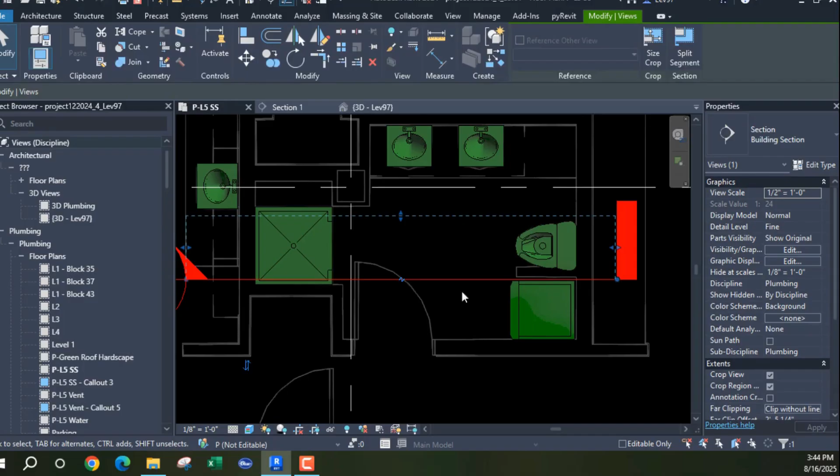So I'm going to go to my section view, and here's the shower, and I'm going to connect my shower to my water closet. I'm going to go so far down, put a P-trap here, and just kind of put it there so I can adjust it. You see, I can adjust it here.

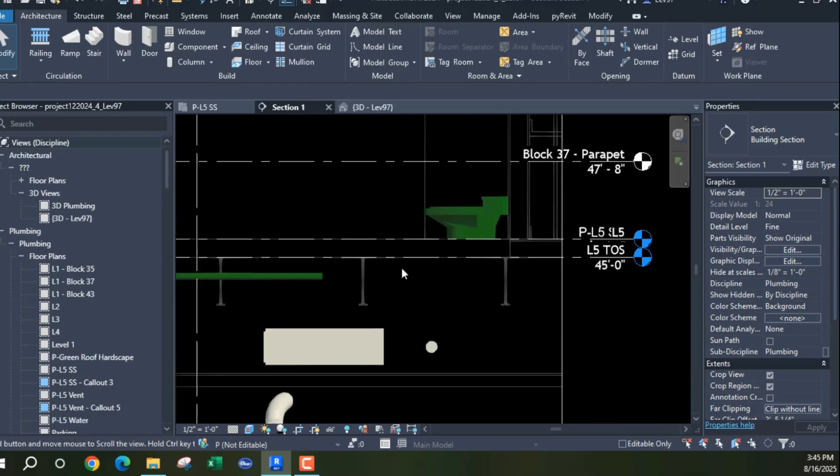And for my water closet, let's bring it down so I can make that connection. From here, I'm gonna go down to the floor below. Oh, I didn't want to do that. Okay, let's try this again. I'm gonna go down to my floor below.

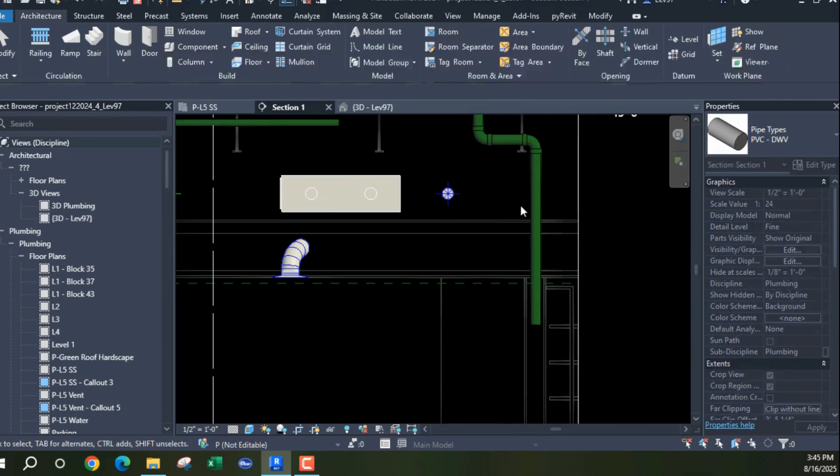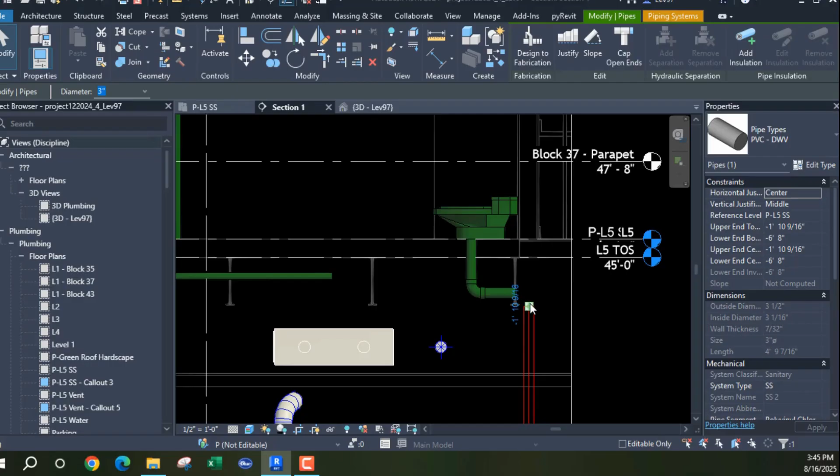Because there's a washer and dryer here, I'm going to extend this washer and dryer over, and the fittings are higher, so I'm going to have to extend this 3-inch pipe. I'm just going to erase this. It's a 3-inch, and from here I'm going to transition to a 2-inch so I can pick up my washer and dryer sanitary.

Okay, so that's that, and I'm going to erase this fitting and come over, because what I need to do is connect to my shower, which is going to be connected to my kitchen sink. So as you can see, they're in line here, but I need for them to be in line in the vertical, which is this direction.

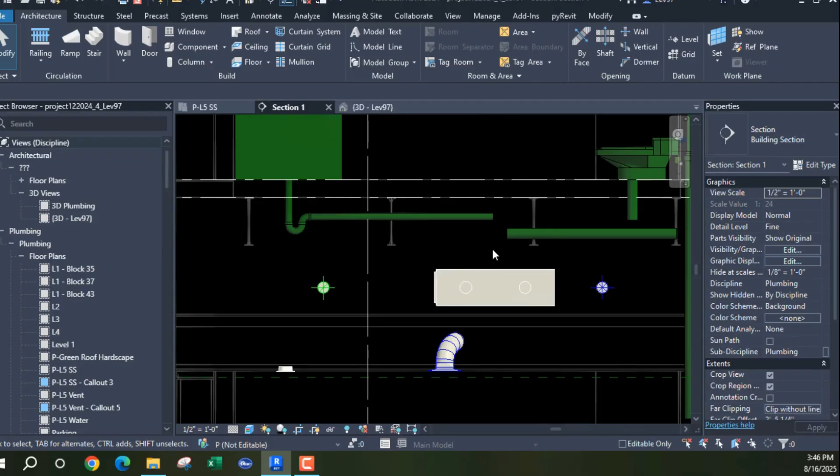So I think I'm going to go up. Let's go up so I can modify and align this pipe with this pipe. Uh-oh, let's go back again. I'm going to align this pipe and that pipe.

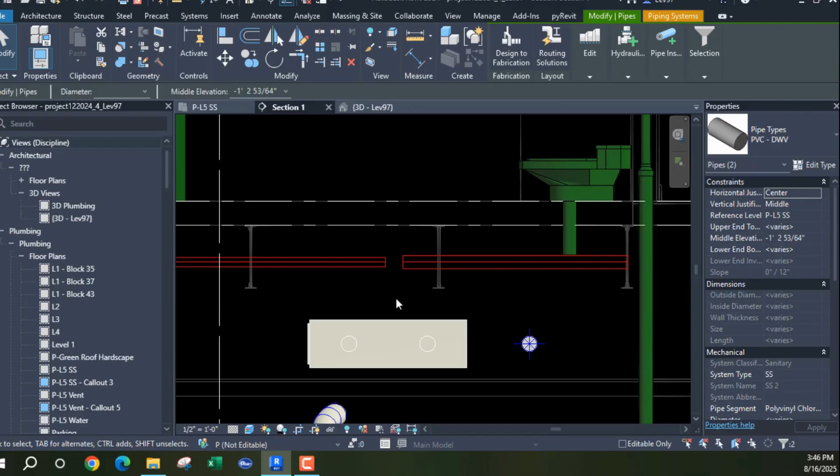So the problem is I'm going to have room. I'm trying to make these go down at the same time using my arrow key, and make this fitting. There's two fittings. There's a fitting here. Oh, okay. There's a fitting here, but I need to change that.

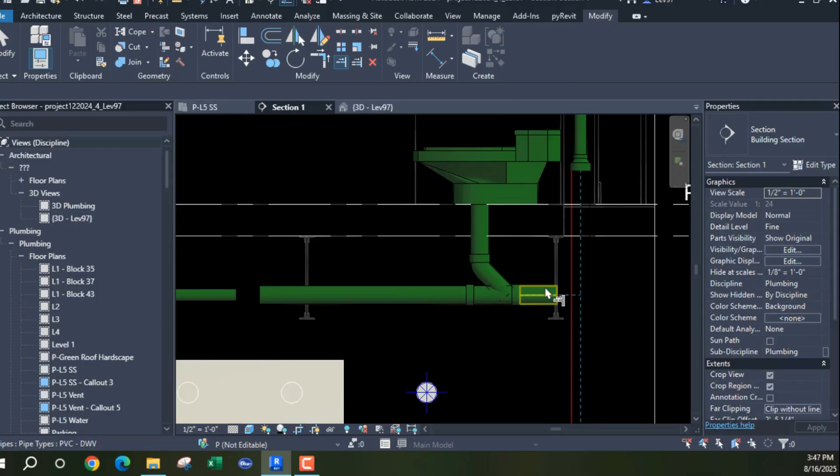And because it's going the wrong direction, I can flip it. Okay. And here, the same thing for this vertical, but only it's going to get a different kind of fitting. So here I'm going to put a sanitary fitting on it, which is this guy.

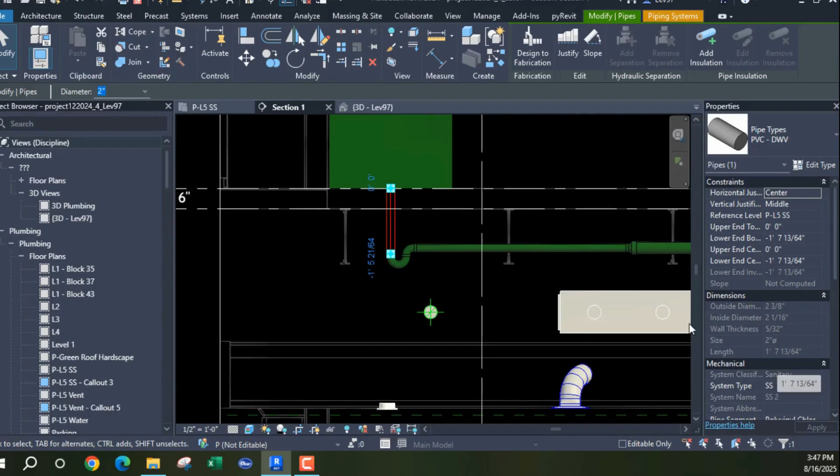Okay, so those two I can extend. Let's extend this over, and it should give us a reducer here. That's our fitting. That should be less than 2 feet, and it is 19. So we have those two. So I'm gonna go over and look at my...

My kitchen sink, because I'm gonna need to have my kitchen sink connect into this 2-inch coming off my shower. But in order to do that, I'm gonna have to go inside my wall space.

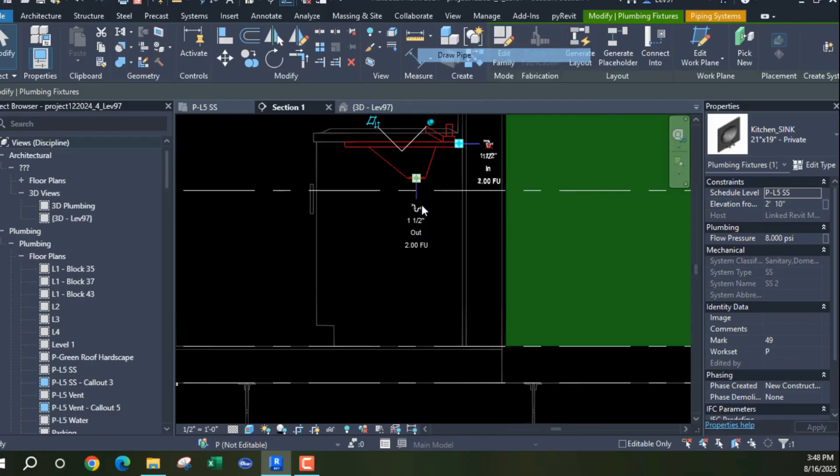Okay, that's 2 feet 10 inches off the floor, which is standard for sink. So I'm going to go all the way down. I'm going to show something here. If I continue to go down, but I can't do that because...

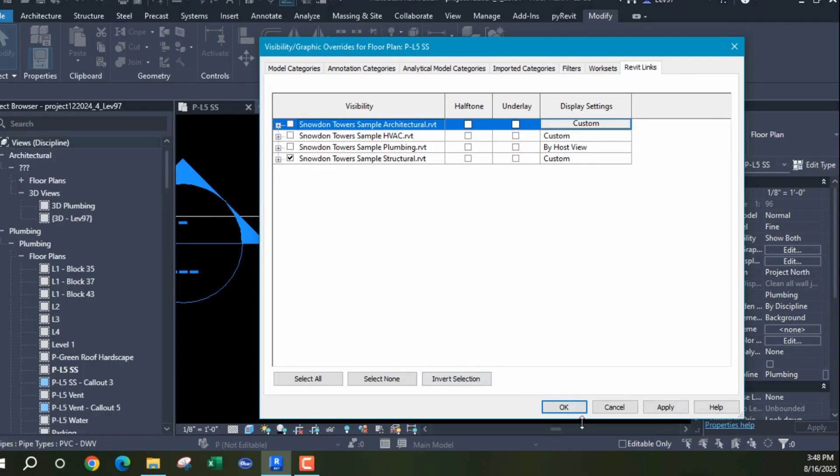There's a beam in the way. So if I change, let's see, if I go here, I'm going to show that there's a beam. Let's see if it's going to show. And here, make this wireframe. So there's our beam.

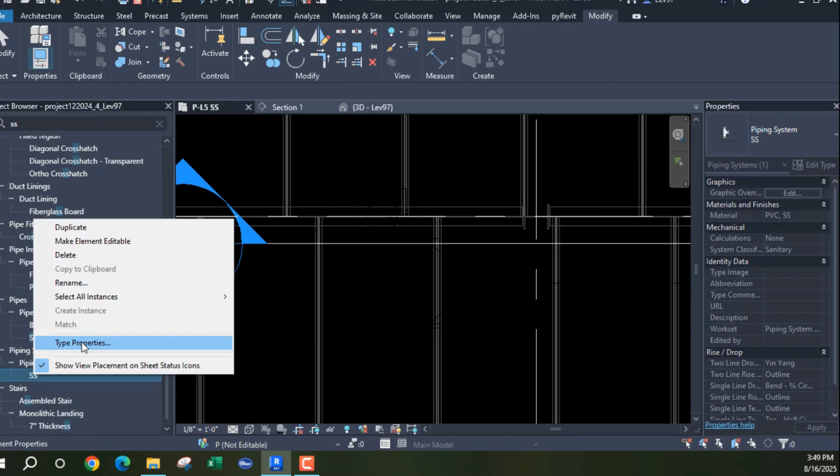And the reason that I can't see my fittings is because if I type SS and look at my systems here, right click on it, and my graphic overrides is white. And if I change that to black, you'll be able to see, let's go here, here. You'll be able to see that there's a beam here. Let me turn this off.

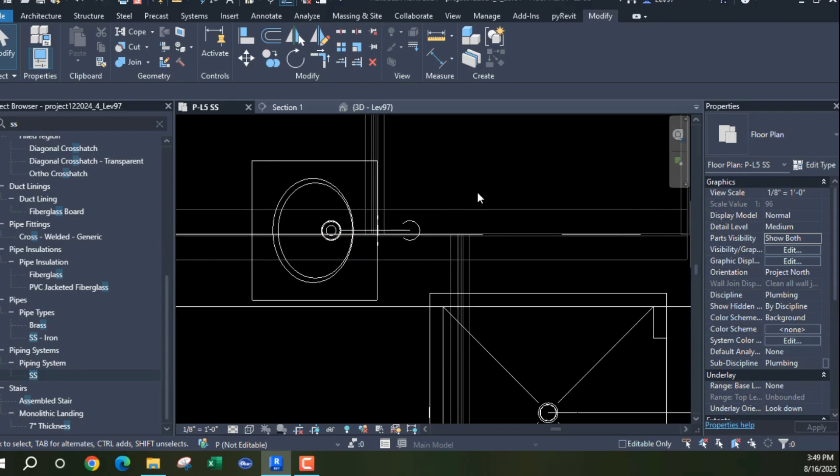And if I tab, so that's a W shape 18 by 55. Okay, so if we look at our, let me go back. Okay, so if we look at, am I selecting? Yeah, so if we look at the 3D here, you can see that it's going through this beam, okay?

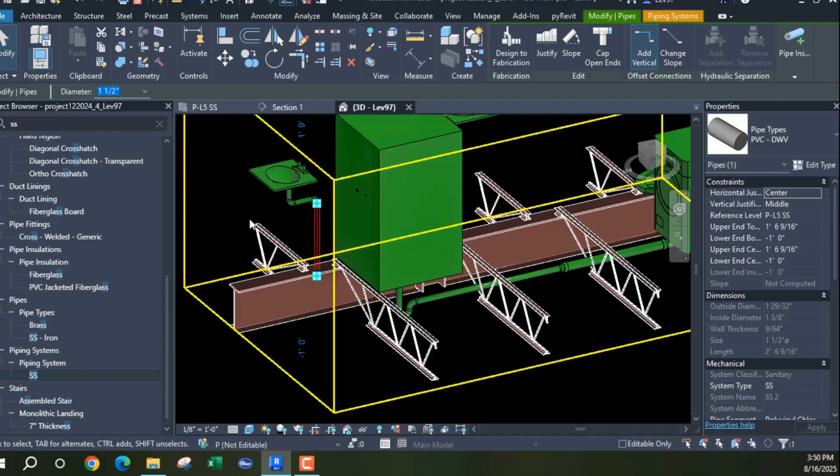So I can't go down to the floor because it's in line with my beam, so I'm gonna have to do something different. So what I'm gonna have to do is draw my pipe parallel to my wall, just coming over here.

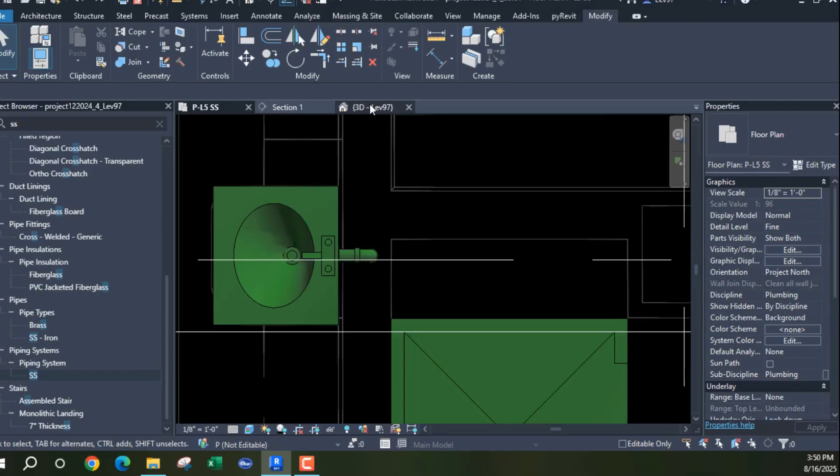Where are we? Are we still going back? Going back. Back. Okay, this is where I want to be. And I think that I need to erase that again. Where is it here? Yeah. So I'm going to need to erase that and draw my line or my pipe over.

Let's go here, and it's here. Maybe I can come out just a little bit more. Okay. And so we've cleared the beam. Okay. So the beam has been cleared.

Let's see, that's fine. So now what I'm going to need, after I've cleared the beam, I'm going to need to go down to where this pipe is. And it is at a negative 1.5. So if I come over...

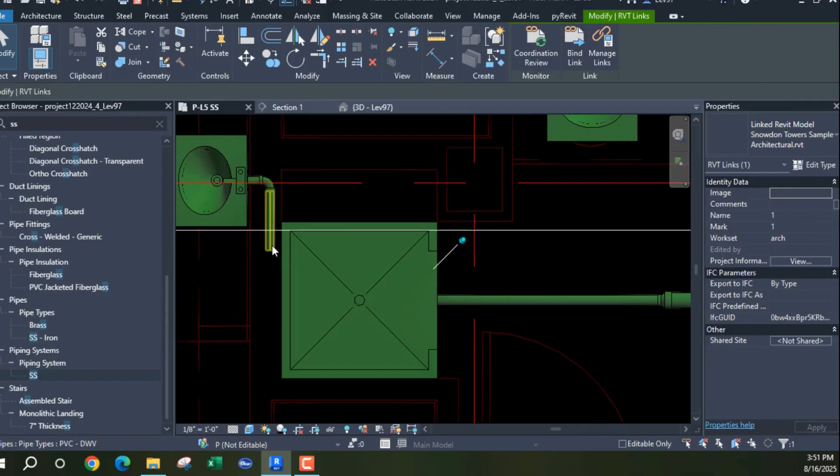I'm going to lock it. I just locked up my architecture plan. So from here, I'm going to come here and go at 45 degrees, because if I go down, I can't.

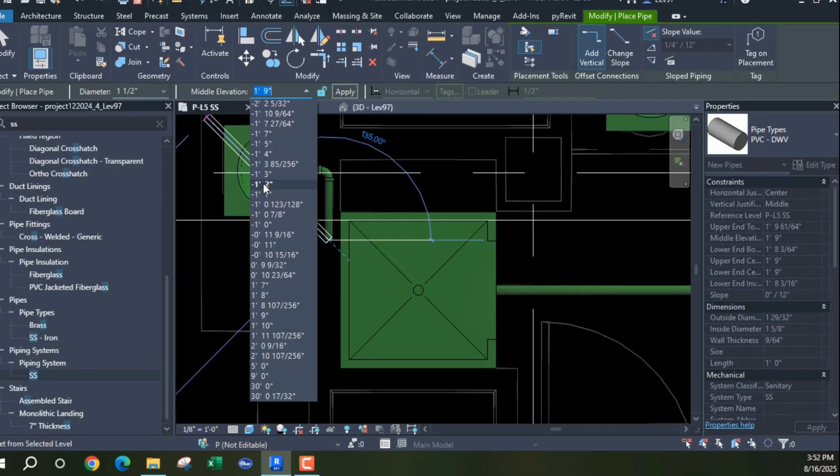Let's see, I have to make two 45-degree angles, otherwise I'm going to need a clean out. But I'm going to have to go down -1.5, I think was this one. But I don't want to go down exactly because I'm going to need to align it up, so I'm going to go -1.2. Okay, and here 45, another 45.

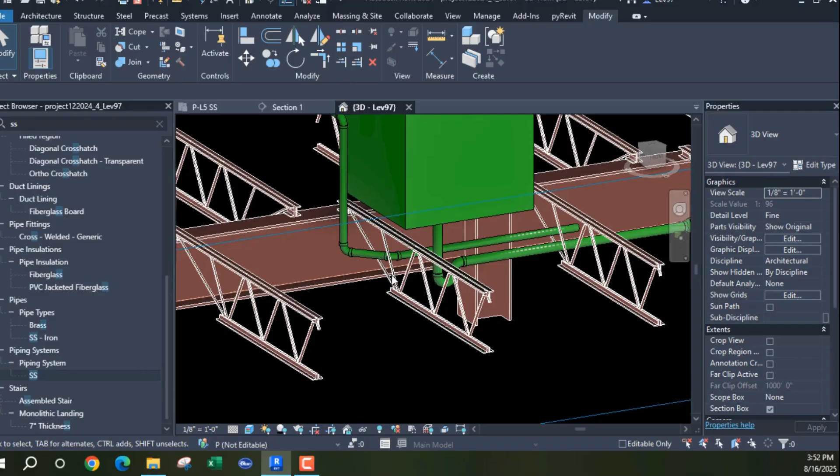So as you can see, what I've done is I've come down, bypass the structure here, come over and come down and create a 45-degree here, so I don't need a clean out. Okay, there's one 45, and that's my second one.

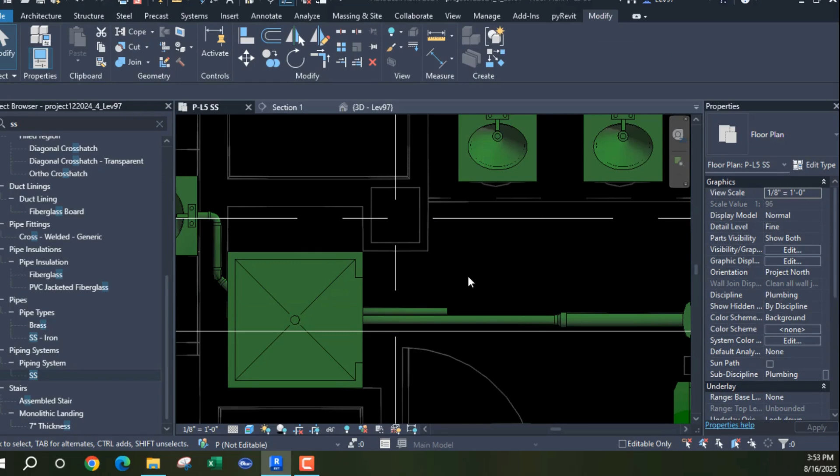So what I'm going to need to do is line up this 2-inch pipe with this pipe. So we go back to the floor plan, come back over here, and we can see that it's right there. So if I go to my section view and my disciplines are on, that means my structure and my mechanical is on, because I don't want to run into any ducts or any mechanical equipment, and that's the mechanical equipment - I turn that off, and tab, it is a heat recovery unit.

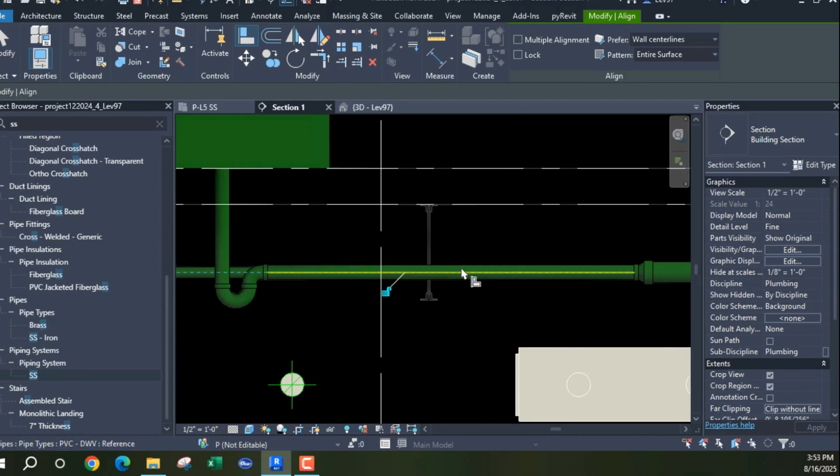Okay, so now what I'm going to need to do is align this pipe and that pipe. From here we can go back. So what I'm going to need to do, let's make this

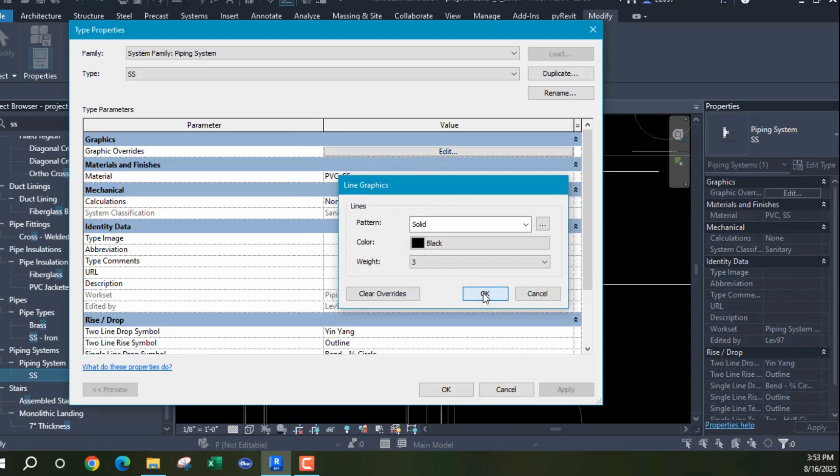Wireframe so I can see what I'm doing. I think another, I'm just going to change this to black so I can see what the heck I'm doing. Was it black or was it white? It was black. It was white. So now it's black, okay, so I'll change it back. So here I can see what I'm doing, and this pipe and that pipe go up.

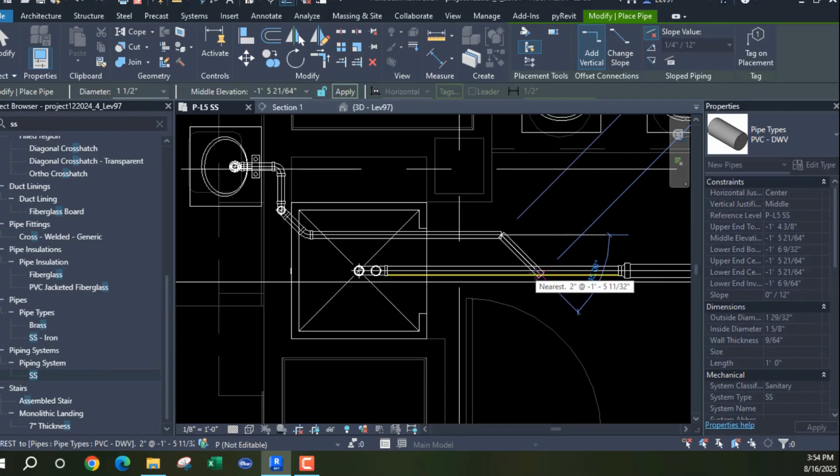So I need to make a 45. Now that they are aligned, can come down and make a 45 here. Okay, so those two. So now let's look at our

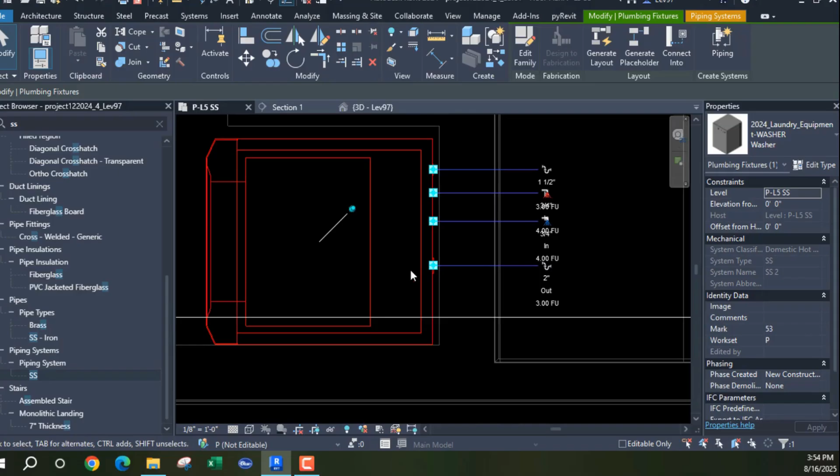So I'm going to come off of here, come down, and I'm going to need to go over. Okay, and this is 210. Let's go 110, so I can drop it 110. Let's come here and drop it 110. Let's go here, drop 110 and go this way.

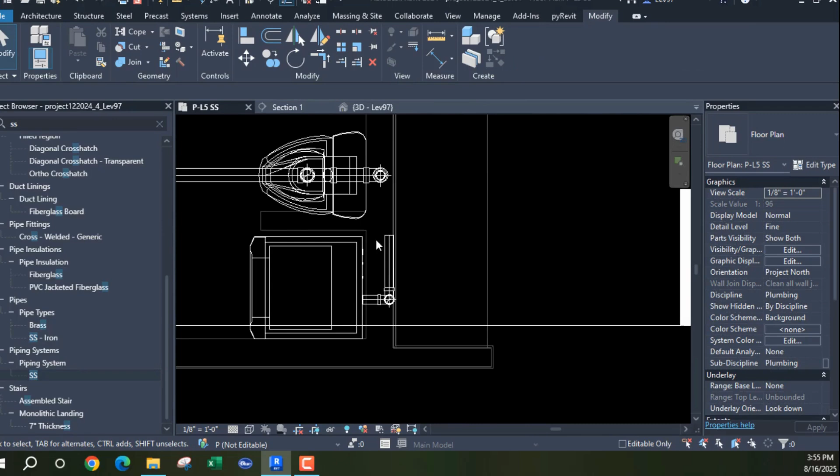So if we go back and look at our 3D view, I'm going to need a P-trap here, and it is there. So that looks lovely, lovely.

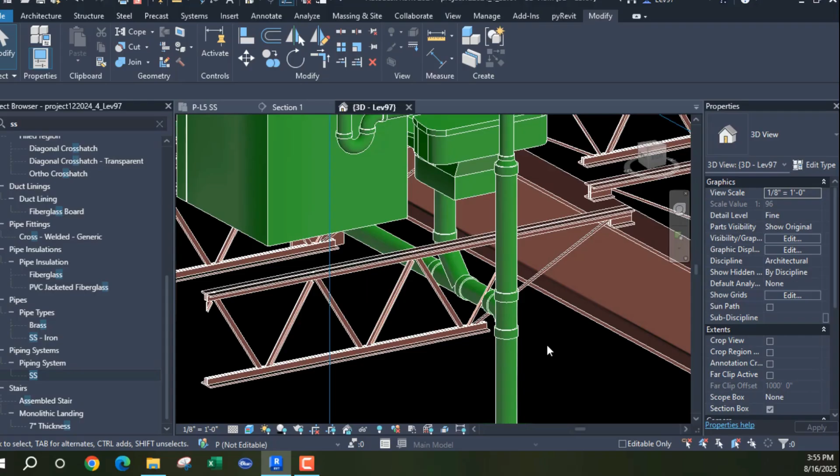And here I'm going to connect into my extended part of the sanitary stack that is, it's going over, but I need to align it. Let's come up a little bit. That's fine. So I'm going to align it, and we can go align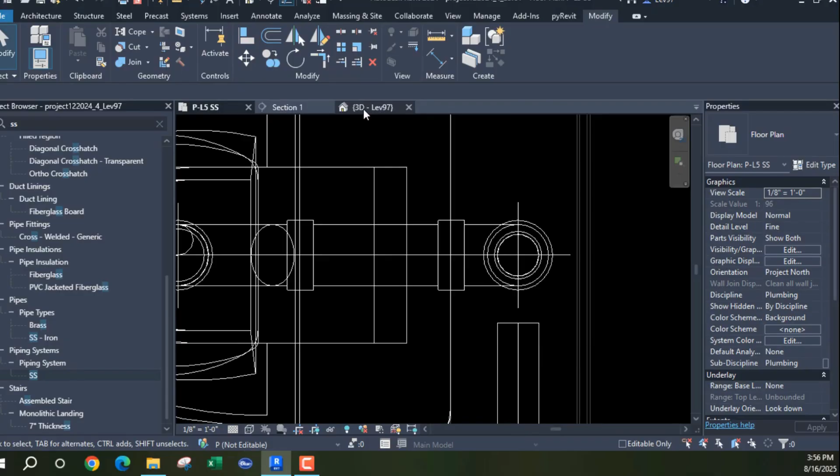Here with that. Go back to a view, and I can kind of get this in an orientation where there's no real interference. So here, here, here, and of course it can either be an elbow or I can cap it here and make the proper fitting there, and we have that.

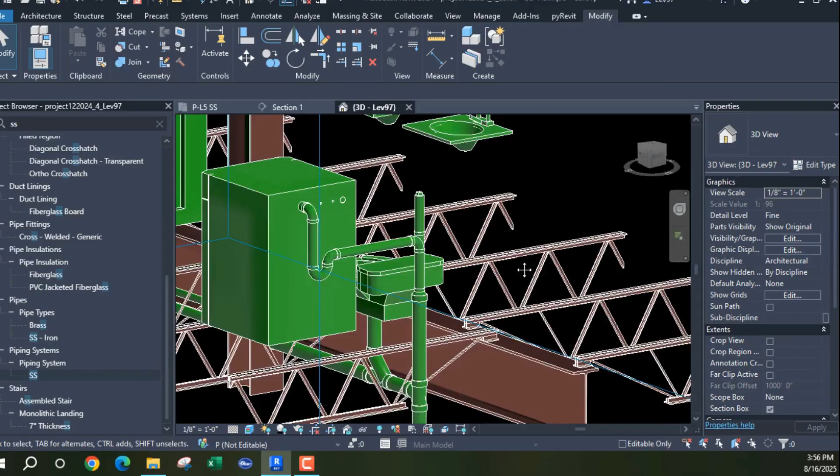So the next thing I need to do is connect these two lavatories, and one of the lavatories is going to drain into the second lavatory. So I'm going to go from left to right and just come down a little bit here.

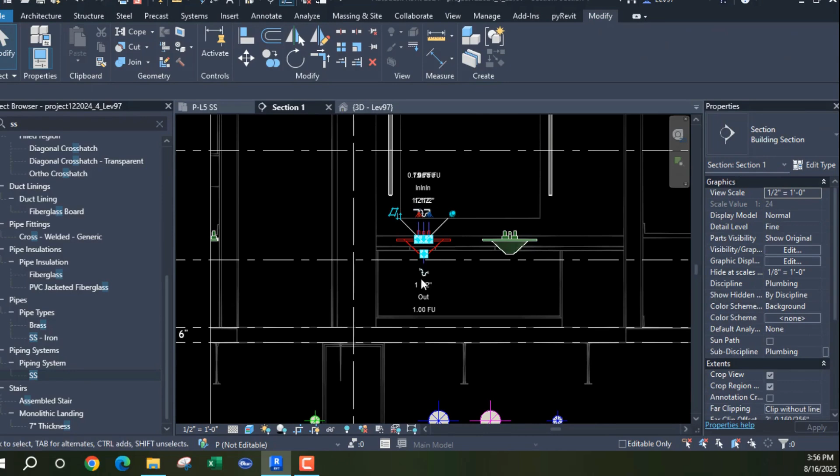Just come down a little bit. I don't need a, let's go over. But I could just come down, because I'm going to have to change the orientation. Come down this way first. Come back. Look at my

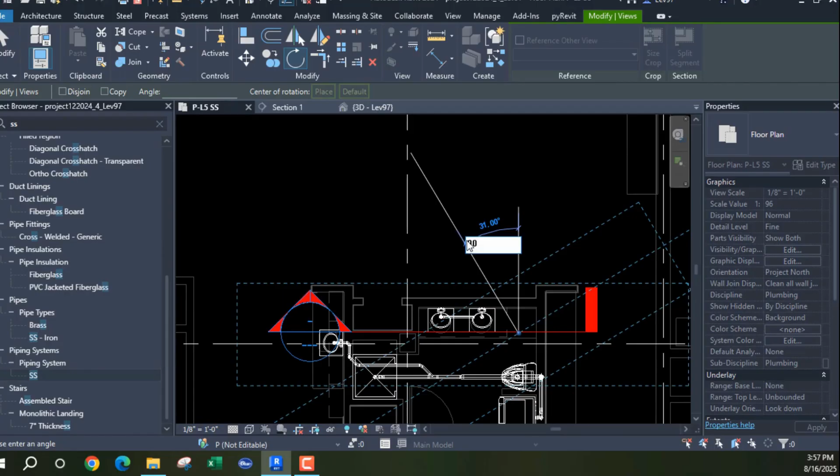Section view. I'm going to rotate that in place at 90 degrees so I can see this other lavatory. Okay, and this lavatory is going to go back to the wall. And back, and come down through here, and it's going to go over like that.

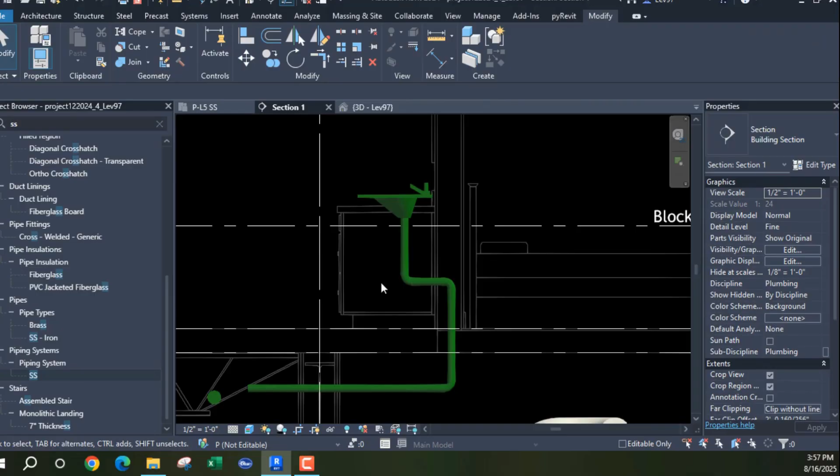Okay, and it needs a P-trap here. As you can see, I think what I'm going to do is come here, here, and move those two up at the same time.

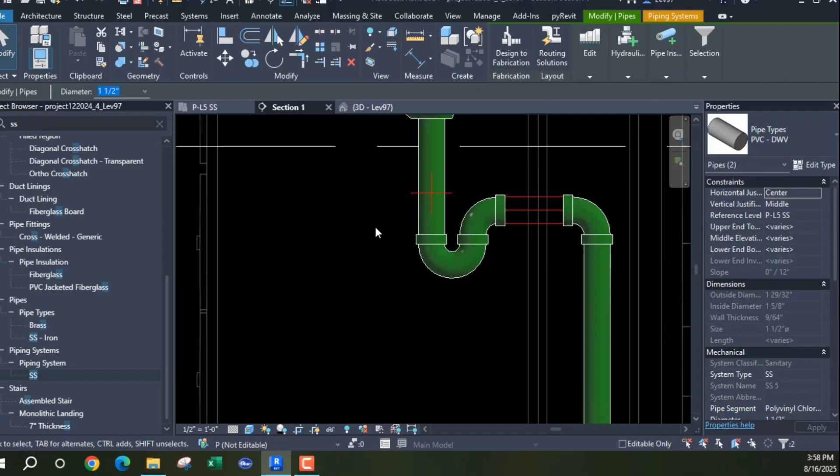Because this pipe piece cannot be more than 2 feet. So I think that that's going to be okay. No, I need some room for my fitting. So let's go back here, and we can make this connection.

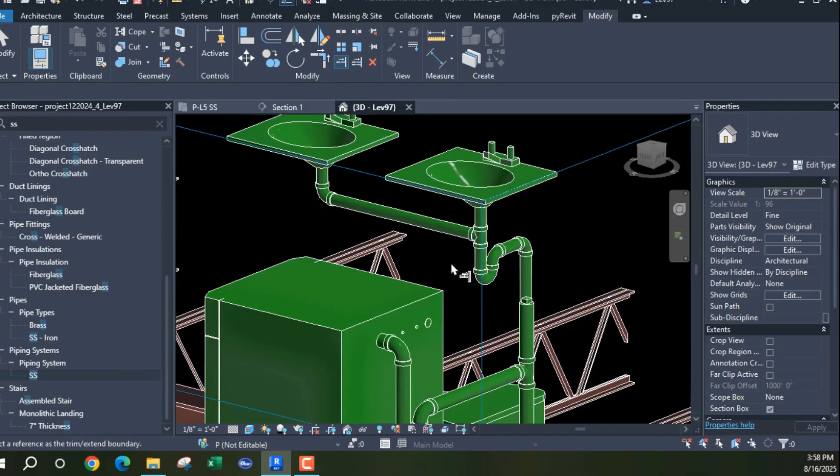Okay, so we'll come here, make this connection. Okay, and that's going to be a sanitary T. Come here, here, here, here, here. So we are gonna, what we're gonna need to do is connect.

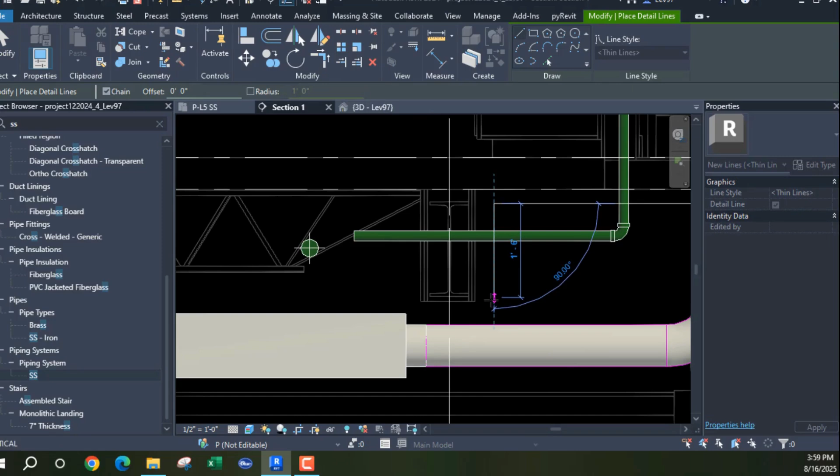As long as that pipe is in the middle third of that beam, it's okay. So I'm gonna come back and just, it just has to be in the middle of that beam. So it's down a little bit, okay? It's here. So this pipe is going to govern this pipe because there's a restriction here, okay?

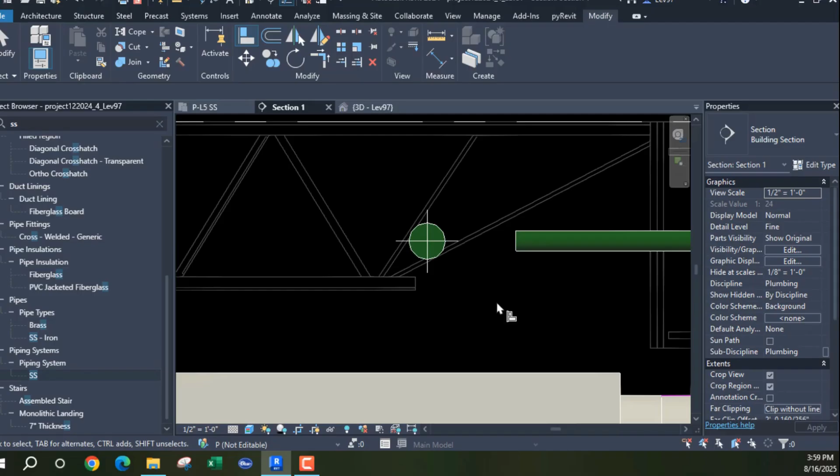So let's do this, I'm going to align this pipe and that pipe. Okay, so now we can come over, and I think that I'm going to, okay, and this is going to be a combination, and it's going that direction. So it looks like 1, 2, 3, 4, 5, 6.

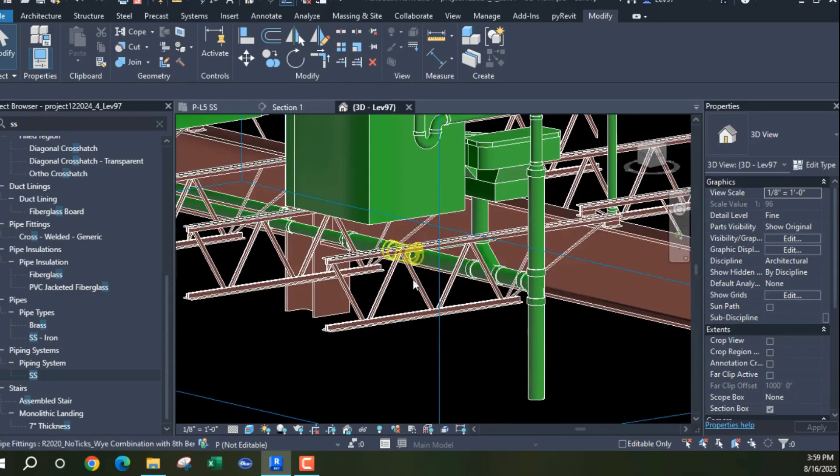It looks like everything has been connected. So what I can do, let's turn this off. Okay, and we can see that everything looks like it's being connected. What's going on here? Oh, okay. And we have our system all connected.